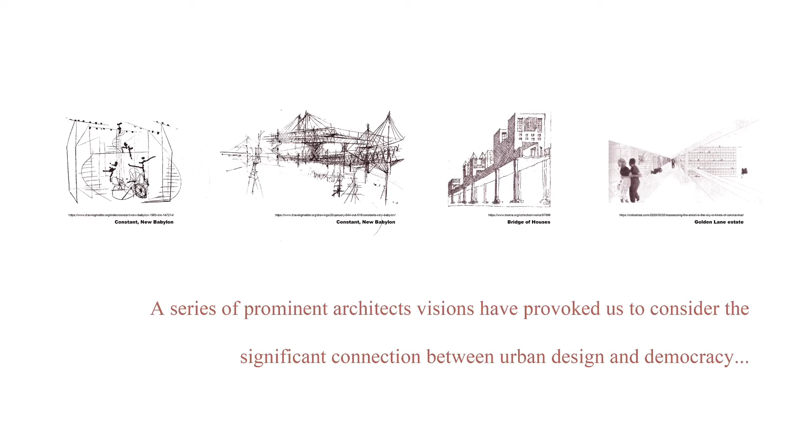Hong Kong has been chosen as a prototype due to its special historical background and highly relevant political status. China has guaranteed Hong Kong the authority to self-govern in terms of economic and political systems for 50 years after the transfer from the British, which means in 2047, Hong Kong will lose its autonomous power and be governed entirely under the Chinese Communist Party. In 2019, the extradition bill triggered anger among opposing parties who want to fight for their democratic identity and ignited a large amount of demonstrations.

As a result, both Hong Kong City and mainland China have been badly affected in terms of economy, crime rate, etc. Hong Kong has always been pivotal in building the economy of China due to it being an international financial hub, commercial hub, and having a world-class port, hence serving as the only gateway for China to the international market. By 2040, this immense impact of the unsettlement has caused Hong Kong to slowly crumble apart.

Hong Kong used to be considered a different entity from China. However, the Chinese government doesn't want to put the opposing parties in exile and create a smaller Hong Kong. Therefore, to fulfill the demands of the protesters and resolve the ongoing chaos in the city, the Chinese government has proposed a levitated community concept that allows them to live in harmony as an entirety by allowing them to utilize the space in the sky and retain their ideology and lifestyle.

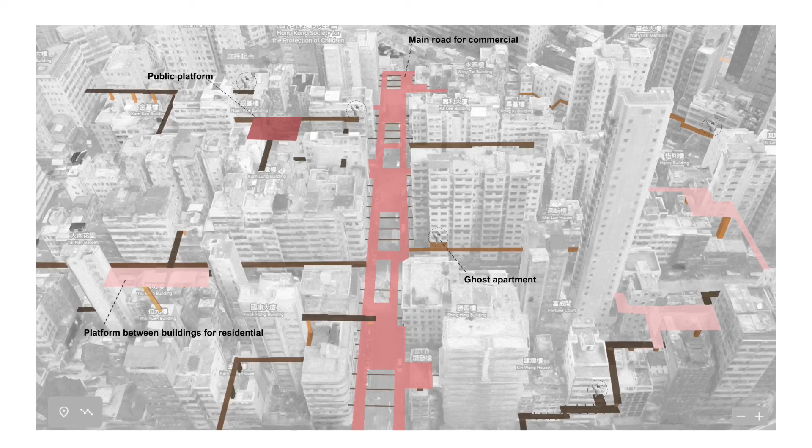The government agreed to sell these apartments primarily as entry and connection points between the city below and above to the people who want to move into the levitated community, at the minimum rate.

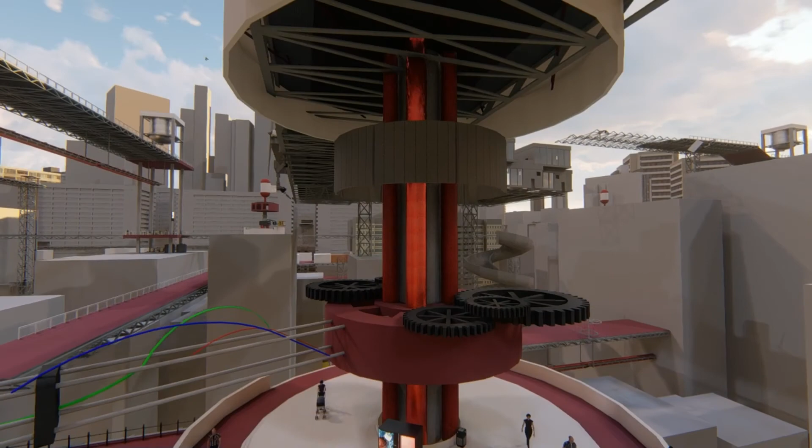In order to provide freedom and democracy for dwellers to design and build their own space, 3D printing technology has been applied in the community as a main method. The 3D printing facilities are placed above roofs of existing buildings, serving also as an intersecting point for bridges converging from different directions and different levels.

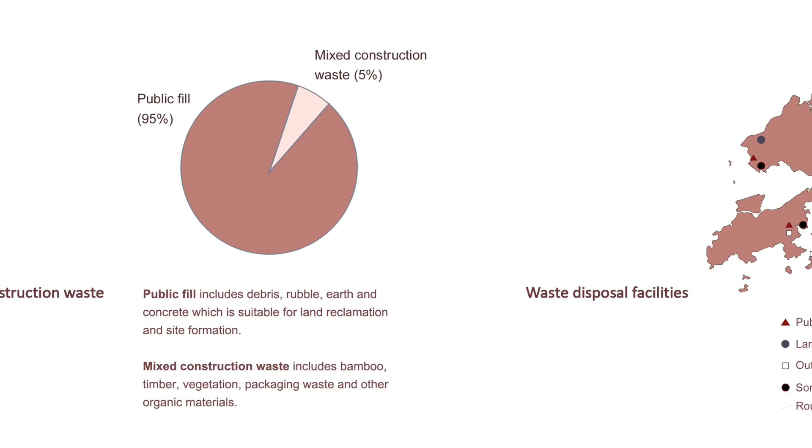The construction waste has become a major consideration, as currently there is an abundance of waste materials composed of 95% public fill sitting in the landfills over the city.

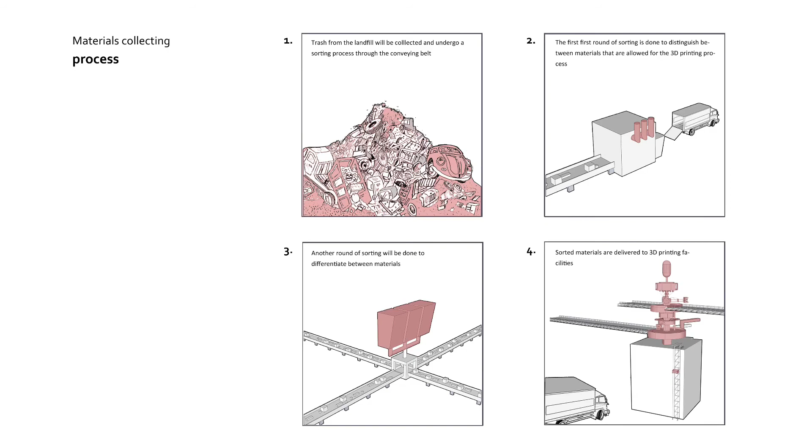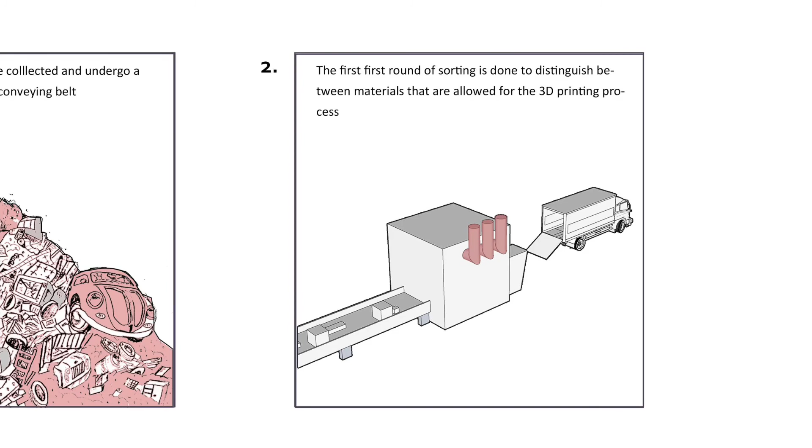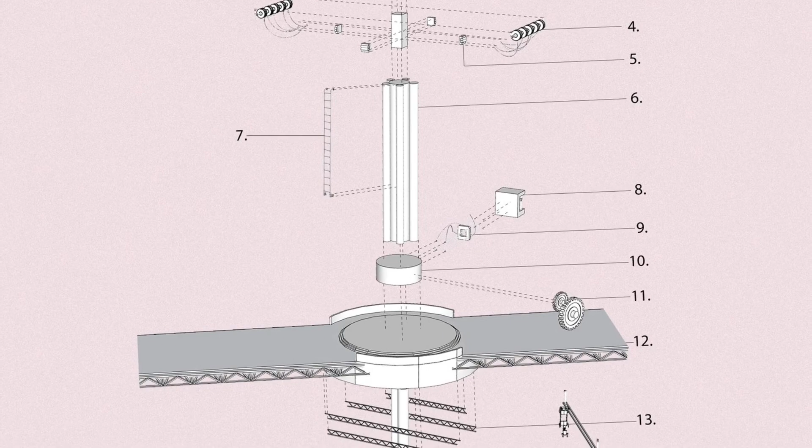For construction, waste materials are recycled from the landfill facilities. After that, they are sorted out to differentiate and determine which materials are able to be used for 3D printing. The sorted materials are then transported to the 3D printing facilities. Synthetic building materials are printed atop the levitated city.

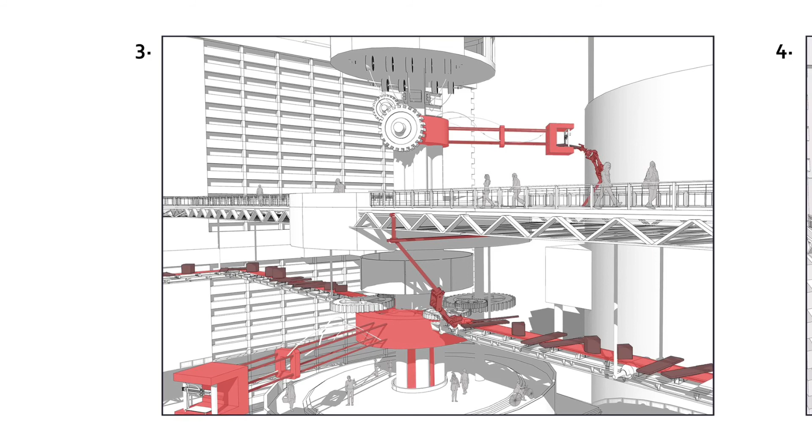The 3D printing process is operated in the control room based on the freedom of design by the community above. Printed materials are transported and built by the robotic arms attached along the bridge. These arms are retractable and able to spin around to achieve complex movements for all activities.

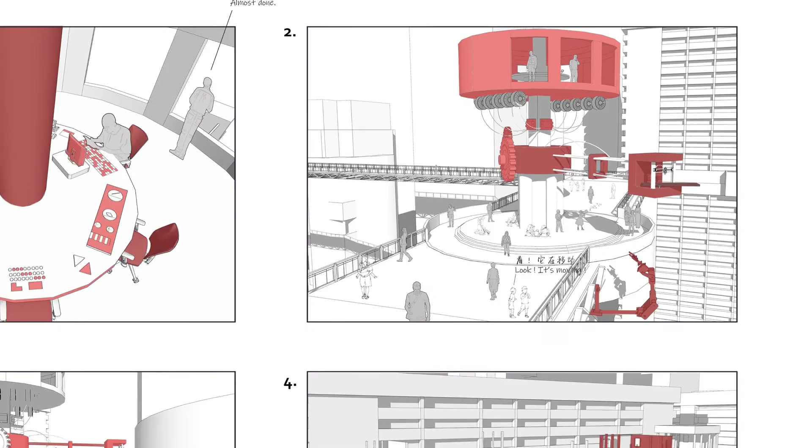Other than acting as a material producing infrastructure, the 3D printing facility also acts as an intersecting point where people gather and hold activities and events. The 3D printing facility is supported mainly by the lift core with a concrete footing carrying all the vertical force, whereas the different level platforms are supported by lateral trusses spanning up to 20 meters.

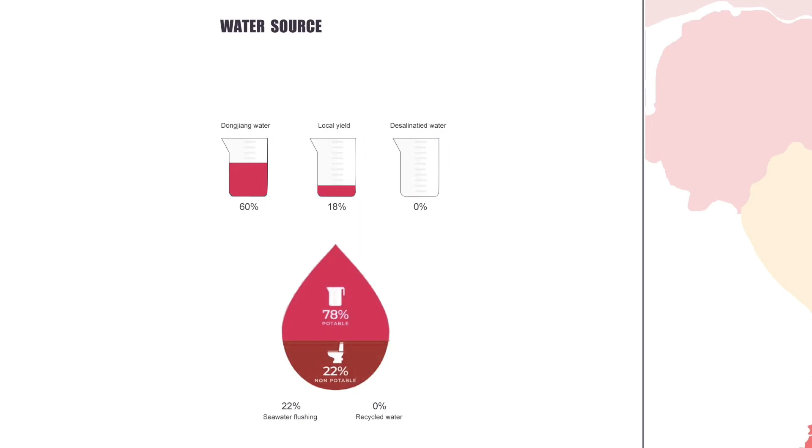Most of Hong Kong's water supply comes from the Dongjiang Water Station. Due to climate change, the water supply of the reservoir is slowly drying up. Along with an overwhelming demand for water, there's a dire need to gather water elsewhere for the city up in the sky. The primary method to collect water is through rain.

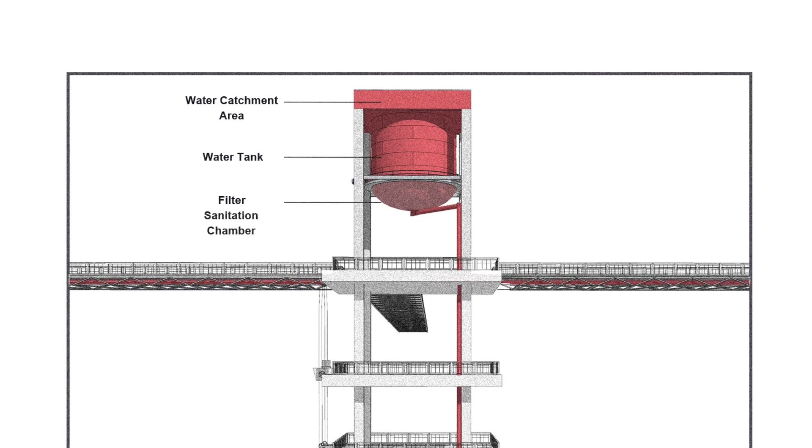By using a rainwater harvesting system, water will be collected through a catchment area. After going through a process of filtration and sanitation, water will be distributed among households and shops.

The harvested water would also be used for the vertical farm right below the water tanks. The vegetables, crops, and various products will be delivered by conveyor belts and gondolas to other parts of the city. The vertical farming system would allow residents in the levitated community to minimize dependency on outside sources for food.

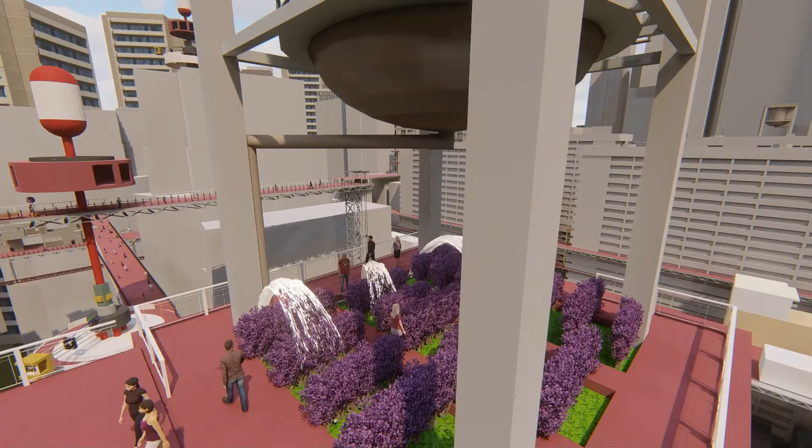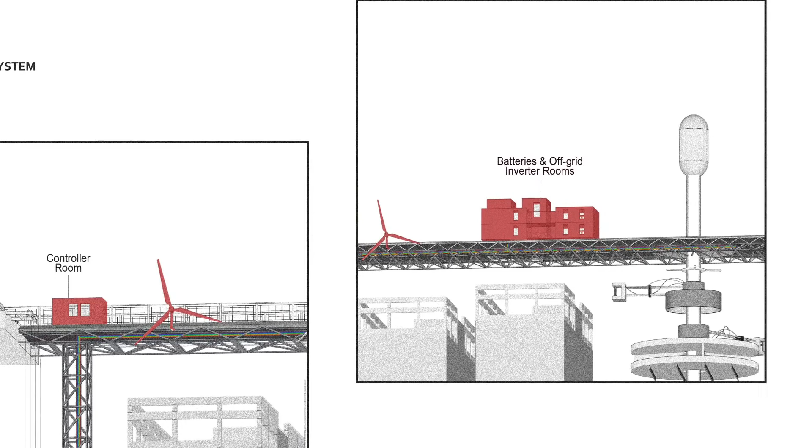For energy, wind energy is used due to its high altitude, which is optimum to install wind turbines, in addition to its need for high power usage to run the 3D printing facilities. These wind turbines are installed on bridges that are not parallel to any facade of a building, to avoid disturbing residents who are already inhabiting the area.

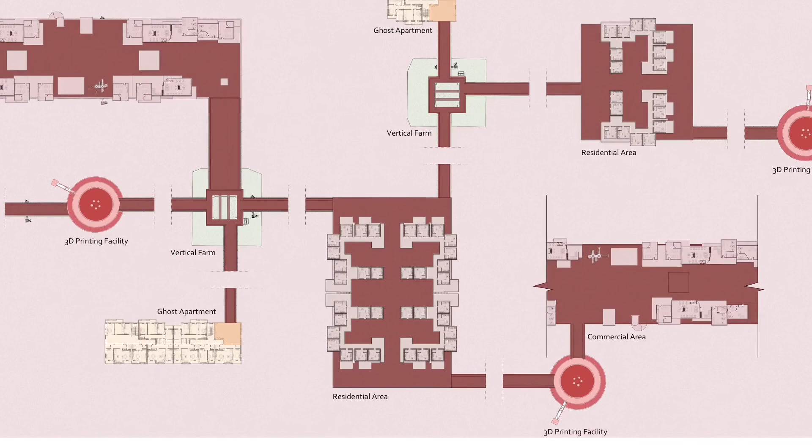Different areas with distinct functions will no doubt be constructed based on the needs of the residents. The residential area will be composed of modular structures prefabricated by the 3D printing facilities and arranged in a somewhat random manner.

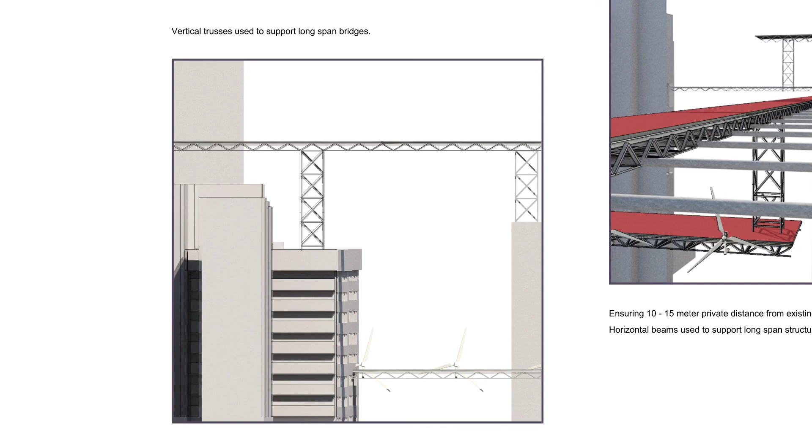An entire system has then been built up in the sky for the community above to operate. Structurally, long-span bridges are supported by steel trusses and a skeletal structure, like columns with bracings, to support the bridges against lateral forces. Each of these columns will be placed on the rooftop of a building and is also a connection between two bridges of different levels that intersect.

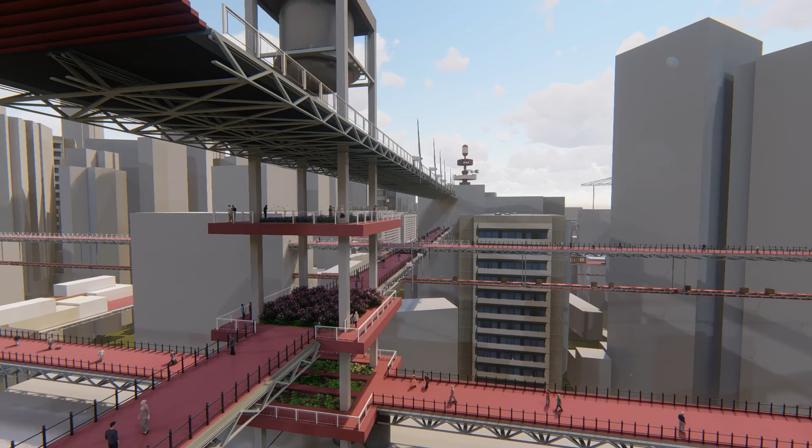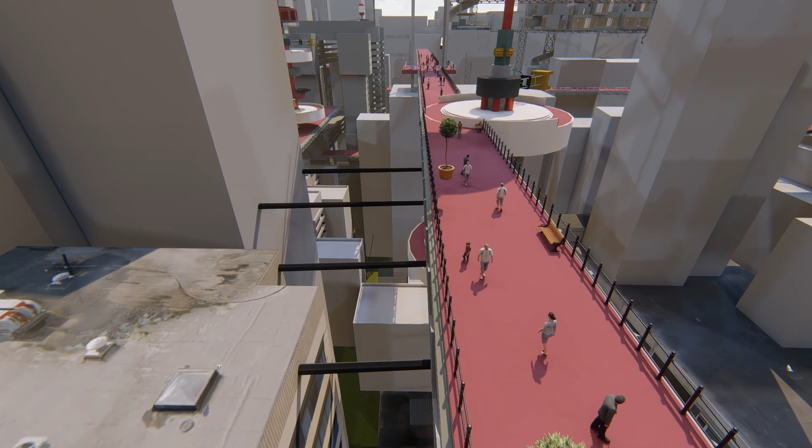As for bridges that do not go over rooftops, horizontal beams spanning from the facades of the adjacent building will act as the main structure. To provide privacy for the residents of the existing buildings, a 10 to 15 meter gap is kept between the parallel bridge and building.

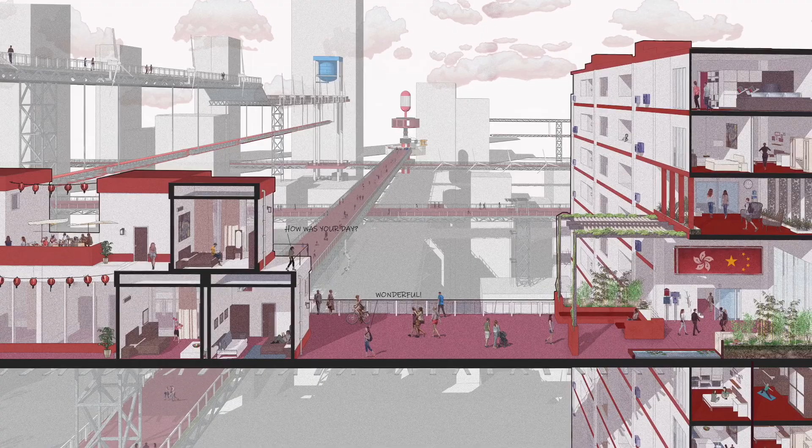The connection between ground level and the levitated community involves going through the lift cores of ghost apartment buildings. With ghost apartments themselves acting as a transition point between the two cities, people from both the existing city and levitated community are still able to interact with each other.

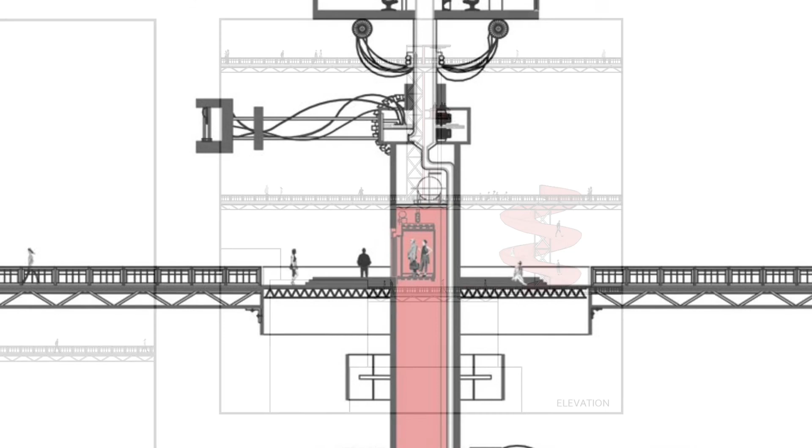Lifts are also installed in the 3D printing facilities to allow people to commute between bridges. Other means of commute include gondolas and slides to reduce overcrowding of the lifts. All the gondolas also act as primary transport for the vertical farms.

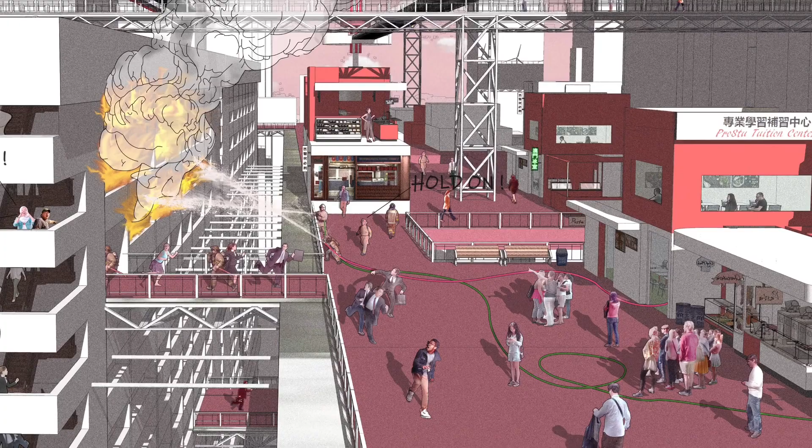As people start to gradually integrate into this levitated community, people of two different parties are able to coexist despite their different political beliefs, building mutual respect and assistance.

The distinct features of the existing bustling streets of Hong Kong are emulated up in the levitated community, as the existing residents would be adamant to maintain their unique identity. The city above would further add to its already happening ambience, further highlighting the hectic nature of Hong Kong's residents.

Fast forward to the year 2077, instead of just using ghost apartments as entry points, more buildings are willing to forego some parts in order to create better flexibility into the levitated community, further fostering harmony among the two different parties.

Hong Kong somehow manages to perpetuate itself, in spite and because of unpredictable human nature. Is this final state protopian, utopian, or dystopian?